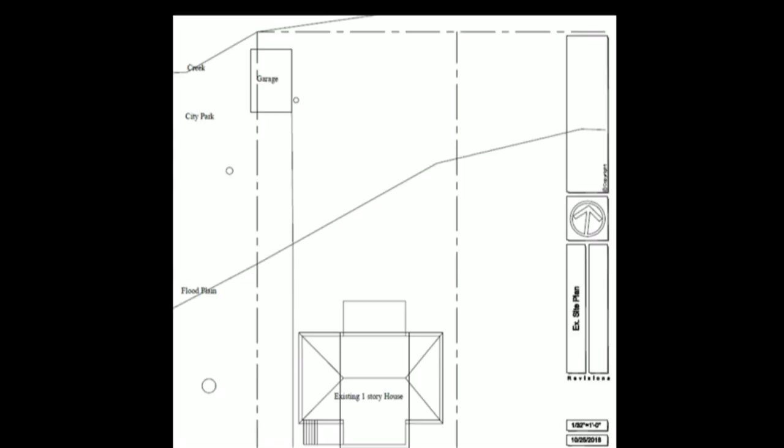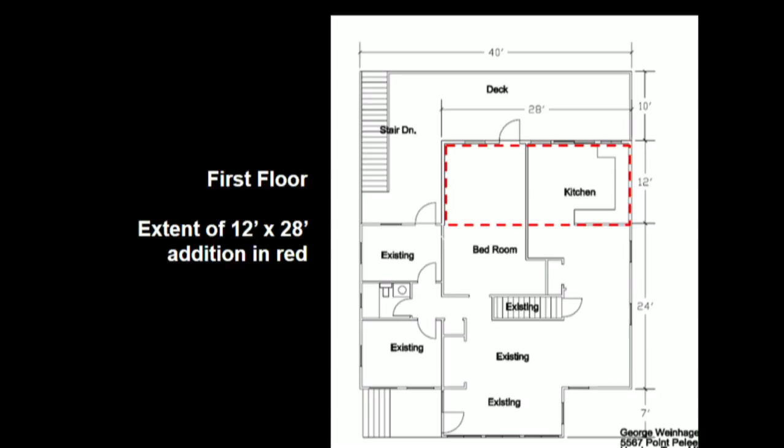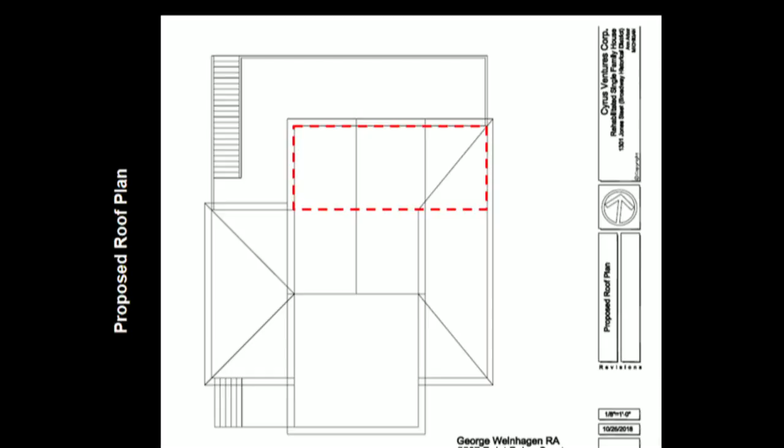This is the first floor. Again, this is the basement, same 12 by 28 addition in the red dashed line. Here you can see the elevations from the front to the rear of the house. We've also got a side elevation that we can reference. Again, an aerial type of view showing the red dashed line of the proposed addition to the rear of the house along with the deck.

The Secretary of Interior Standards. Number 2, the historic character of a property will be retained and preserved. The removal of distinctive materials or alteration of features, spaces, and spatial relationships that characterize a property will be avoided. Number 9, new additions, exterior alterations, or related new construction shall not destroy historic materials that characterize the property. The new work shall be differentiated from the old and shall be compatible with the massing, size, scale, and architectural features to protect the historic integrity of the property and its environment. And number 10, new additions and adjacent or related new construction will be undertaken in such a manner that, if removed in the future, the essential form and integrity of the historic property will be unimpaired.

SOI guidelines, building site. Identify, retain, preserve: recommended retaining the historic relationship between buildings, landscape features, and open space. Not recommended: removing or radically changing buildings and their features or site features which are important in defining the overall historic character of the building site so that, as a result, the character is diminished.

District or neighborhood setting. Recommended: identifying, retaining, and preserving building and landscape features which are important in identifying the historic character of the setting. Not recommended: destroying the relationship between the buildings and landscape features within the setting by widening existing streets, changing landscape materials, or constructing inappropriately located new streets or parking.

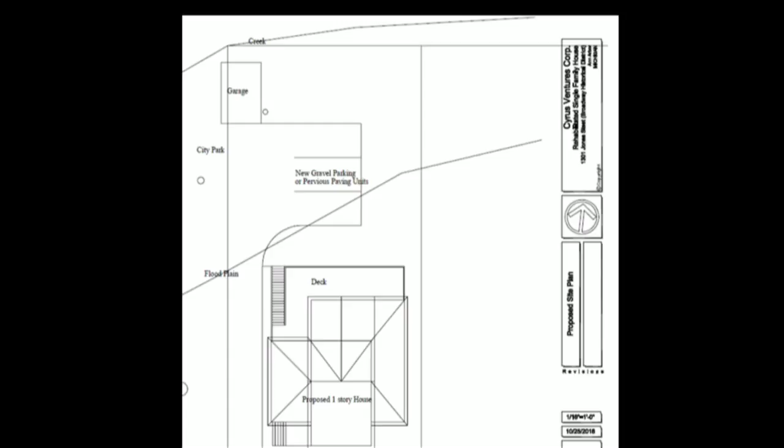You don't need my address, right? No, just please sign in. There's a sign-up sheet. My name is Abraham Marsban, I'm the owner of 1301 Jones Drive, and I can answer any questions with George's help.

Do you have anything more to add to the application at this point? First of all, we'd like to thank you for the site visit last Tuesday. It was very informative, both to us and hopefully to you.

Out of that discussion, we tried to show you what we were working with. There have been some discussions of additional retaining walls to protect the floodplain. We're working with DEQ on that issue, so that we are not changing the hydraulic aspects of the floodplain in any way.

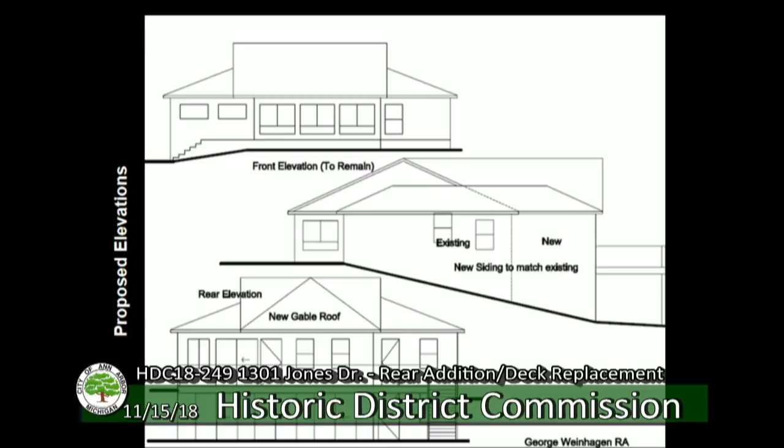With that in mind, the drawings that you saw were somewhat preliminary because we were trying to meet the deadline for your commission. There's not much change though—he's prompting me to remind you that we are not changing those drawings to any major extent related to historical aspects. We're not changing. And I believe Abraham has talked to Chris and to Jill since the site meeting to assure them of what we're doing. I believe that gives you the information you need from a historical district perspective.

We're not changing. We're maintaining the existing siding and using the existing siding, which isn't the original siding for the building when it was built.

It has portions of a Michigan basement, and it has some log joists in it. It was built back in what I would consider to be the 1830s to the 1860s—the original portion of it. Then there were two additions, one on the north and one on the south, and that's what you see today.

And then there was a covered porch, which I think was on the original house, but then they enclosed it and made it an atrium type of thing on the front of the house, which has been there. It was permitted, and you saw it in the site visit. That is not to change.

So the one thing I don't see on our plan is the location of the egress window. If you go to the basement layout—in the basement layout, what I had done on the original drawing was show three sliding doors because of the view out there.

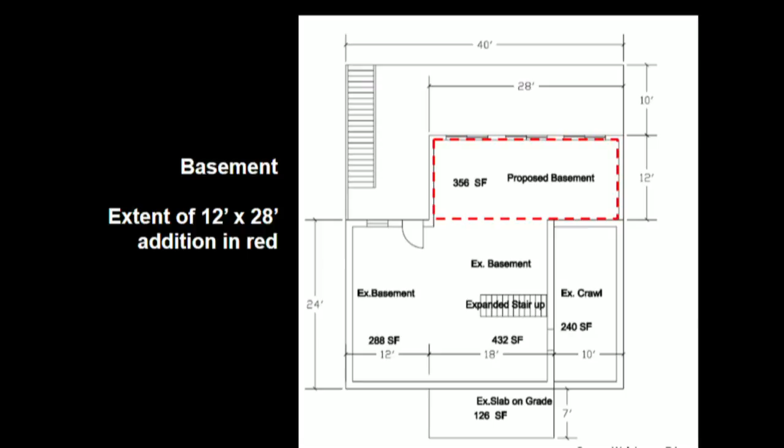I think one thing that might come up is when you do have your landscape plan, we do go through landscape plans through the Historic Commission. And I would talk to Jill about that next week before you guys start doing that. You may have to put in another application with the landscaping. I will certainly work with Abraham on that. I will be involved with this project as it goes along.

I'm not sure there's going to be major landscape changes—mostly what's in the plan. But how tall is the retaining wall projected to be?

Well, the retaining wall will be a retaining wall. Whether we have vegetation in front of it or behind it—probably not behind it, maybe some in front—anywhere from 0 to 3 feet. Not higher than that. Oh no, it's not going to be tall grasses or anything like that. Most of it will probably be no retaining wall, but in some sections it may come up to 2 feet.

Well, the height of the retaining wall, not the vegetation—the height of the retaining wall will probably be approximately 3 to 4 feet, with its foundations below it.

Since we have more than 18 inches of fall, we need to protect it, so we will probably have some form of railing there also.

Okay, so make sure you bring that up with Jill, because it's not in this application. It wasn't in the other application either, and you may still have to. Jill and I had a conversation with Chris this morning.

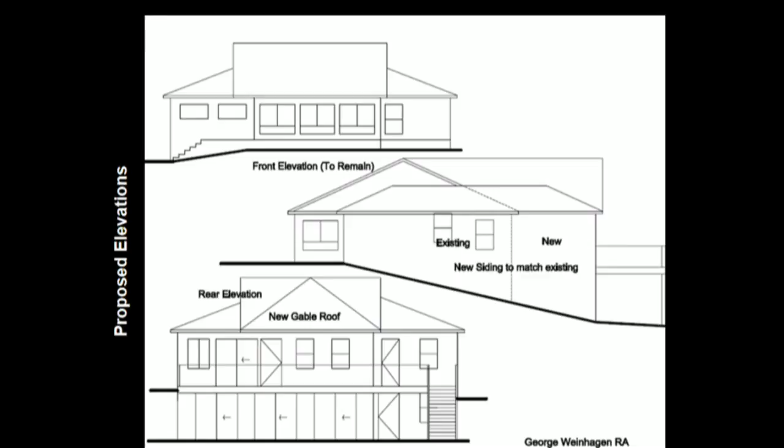So I'm talking about on the elevation at the bottom of the sheet where we have the sliders at the basement level, only one sliding door? The slider that is most to the south.

Also, the door you notice there underneath the deck will no longer be there, because we're putting the door in facing the wall coming out, and the 12-foot wall coming out, so you will not have that opening there.

So what do you see there? I'm not following what you're describing. Well, I don't have a stylus with me, but we can go back to that door. Have you got the plan?

Oh yeah, so the north elevation is the side that faces the backyard, which is where, well, we're having discussions on that. Okay, so for reference in this meeting, the north elevation as shown on the plans is the rear of the yard, and that's where the addition is going.

You will only have that sliding door, you will have a single window, and then a double window there, and that's all we need.

Okay, did you guys understand that? So a sliding door instead of the 3 sliding doors, a single window in the middle, and a double window on the... then where's the egress window we were talking about earlier? Because I thought that was on the north.

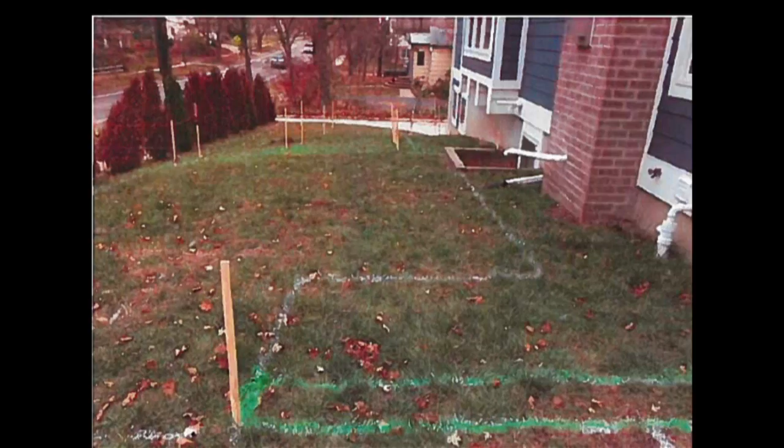Here are the pre-snowfall slides, provided by the applicant, which may be easier to look at, with the green lines where the proposed wall is along South 7th. Then you can see some of the patio area going down and some of the turf area. You can always refer to these, the steps that will be going down to the patio area - a spiral staircase. You can see just above where the window will be converted to a door.

Again, steps down towards the driveway. The strings will show you some of the heights. We can always go back and refer to the proposed heights. Again, looking along South 7th, going south, where they're proposing the wall.

Again, this is along the drive, proposing impervious surface. This is an adjacent neighbor, actually across from West Jefferson, with a similar type of retaining wall. You can see some of the heights and materials we can refer to. These are, from the applicant, some of the materials that may be proposed or could be in consideration. An elevation

from South 7th. Again, kind of an aerial view of what's being proposed - the turf area, the brick paved area, the landscaping and the walls. Again, another view. This is the gate to be located at the front wall of the house. This is an example of the stair to lead from the new west elevation door to the patio. You can look at those locations on the plot plan. Again, materials that may be used. Other examples.

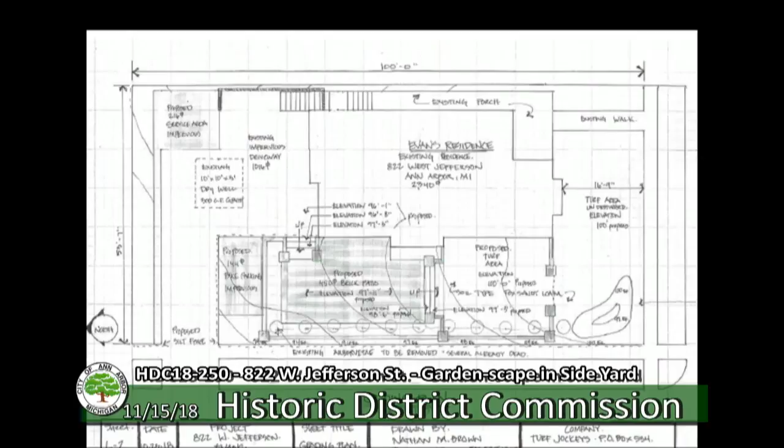I mean, would there be any objection to - I don't know if you agree with me or not - but just the 3 front ones that are actually on the sidewalk, I don't think any of the other ones will have an effect as much as those.

And even with the landscape plan, I think getting rid of the ones that are right on the sidewalk would help knock it down a little bit. Sure, with the 3-foot height opposed to the 4-foot height. Yeah, and I think that brings up something else we discussed, but maybe we should save that for the discussion section.

I have a question. The brick patio that you're going to walk down to, you've got an elevation for it, 97 foot 11 inches, but I don't know what the elevation of the finished floor is - is that 100, or is that where you're working down from? I wasn't sure, and the reason I was curious was trying to visualize the spiral stair. The way it's drawn, it looks like you come out of the spiral stair and then walk underneath the landing you walked out on, but I didn't think that would be possible. No, it won't. Okay, is it more like the photo you included where you sort of spiral and then come back?

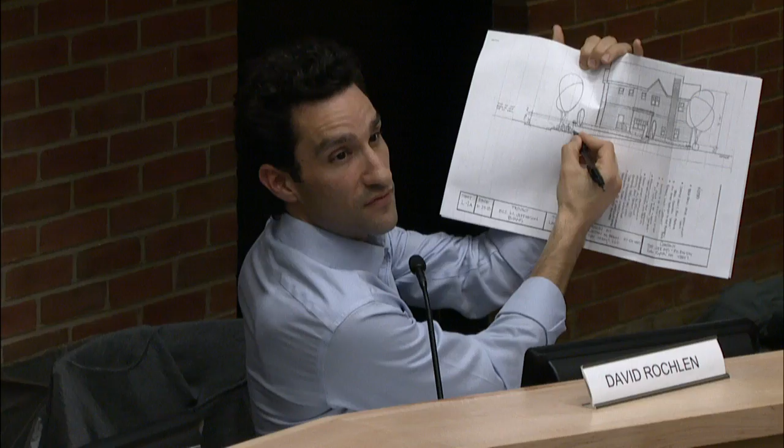So somewhere here, there's the windows, and then my last question here, just to understand it - that 9711, where is it relative to the height of this wall here? It's about in the middle, right about there. So is it right there, or is it below? It's slightly below that. Got it, okay.

All right, sorry for the confusion. Nope, that's okay, that's why I'm having a question. Okay, I think those are my initial questions. Any other questions? At least. All right, thank you. You may be seated.

Oh wait, I have another question. Well, in one minute - sorry, sorry Nathan. No, it's okay. All right, okay.

Let me just make sure - it says existing rain garden. Are you going to be planting things in the rain garden, or are you just leaving it exactly how it is? We're probably going to dress up the wall sides, is all we're going to do, but we're not touching anything with the rain garden itself. We're going to make it look a little nicer than it is now, to be more appropriate to what the landscape looks like now. So yeah, we're going to keep the integrity of that rain garden.

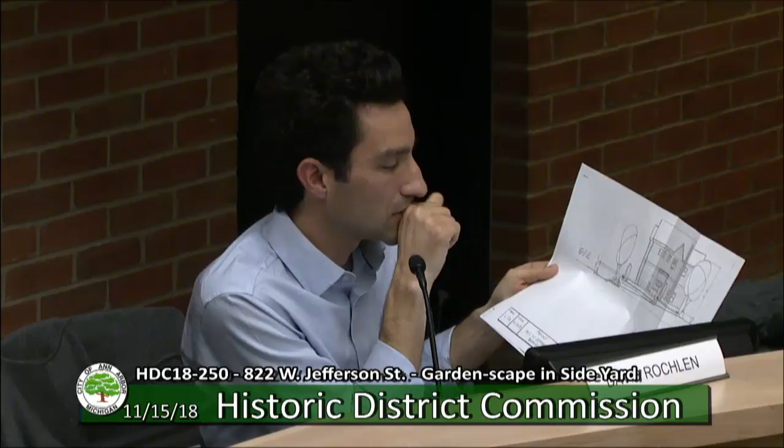Last question - at this wall here, that's a far drop, do you need a guardrail there at your patio? Because the wall's above the patio. Correct, down there by like 3 feet. So it's a 3-foot wall? It's a 3-foot wall, not a retaining wall, it's just a wall. It's a 3-foot wall at that, correct, okay.

And then we've got the landscape on the outside wall - we've got buffers, 3-foot boxwood hedges around that, so we've got a 3-foot buffer, okay. Correct. All right, and then I guess that access works - if it's 3 feet high, then you're good. Okay, yes, thanks. Yeah, because there's really not much of a drop off once you hit that side elevation.

Where that bike is parked, that area is only maybe less than a foot lower than the grade of the patio. You think the bikes are just a foot lower than the patio? Yeah. Yet there's a 4'6" wall there? Okay, yeah, all right. Correct.

Moving on to the public hearing, are there any members of the public who would like to speak on this agenda item? If you're going to come up, please make sure to state your name and sign in on our sign-in sheet right up front.

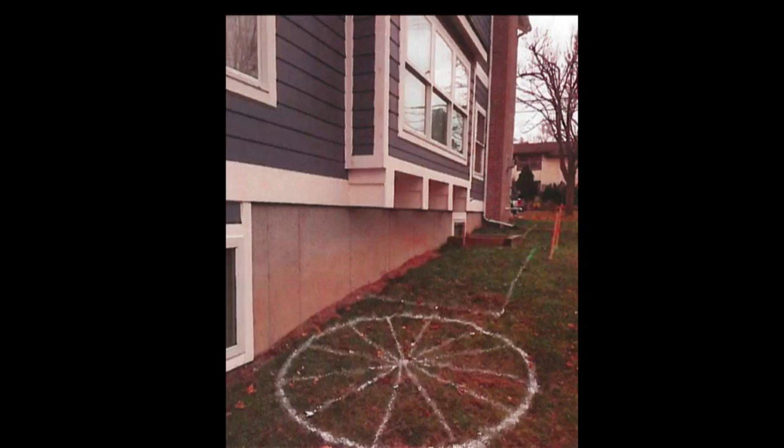So on-site, Commissioner Cope and I discussed potentially minimizing that wall height to be 6 to 8 inches above the patio line, above the finished grade consistently, so that it creates more of a buffer. If you look at some of the surrounding houses in the photos, it's just a short retaining wall with a little bit of grade above it—plenty of support, and it also gives a nice landscaping feature and creates a buffer. I think there's additional planting along the proposed plan that would still provide some screening. I just wanted to put that out there for discussion from the rest of the commissioners, and potentially to the applicant.

Yeah, I agree with you. I just think, seeing the northwest side, I don't know that this application as drawn meets the standards as far as the spatial relationships and neighborhood setting. I think there's definitely a lot of potential—I don't have any issue with the interior scape of it. I think it's a beautifully drawn plan, and I don't think we have any problems meeting the standards with the plan itself. I just think the wall height, being up above everything, doesn't really fit the character of the neighborhood and the surrounding settings.

Which I'll pull up—regarding the wall, Secretary of Interior—should we just talk about the wall as a topic? Yeah. I agree, I'm slightly disagreeing with what you're saying but agreeing in concept that, to me, the wall, especially at the end, is too high for the neighborhood. If it was in a backyard or something it'd be totally different, but it's right on the sidewalk.

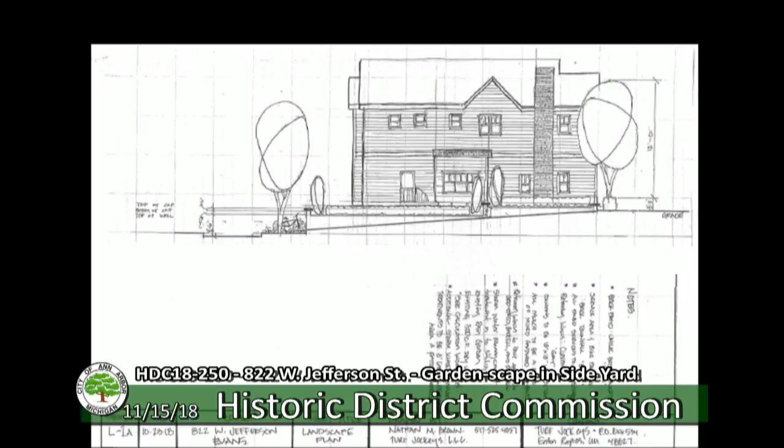At that corner where they meet, there's right there where the steps are, there's a 4-foot drop off right there on the sidewalk. 6 inches off plus the 12 inches.

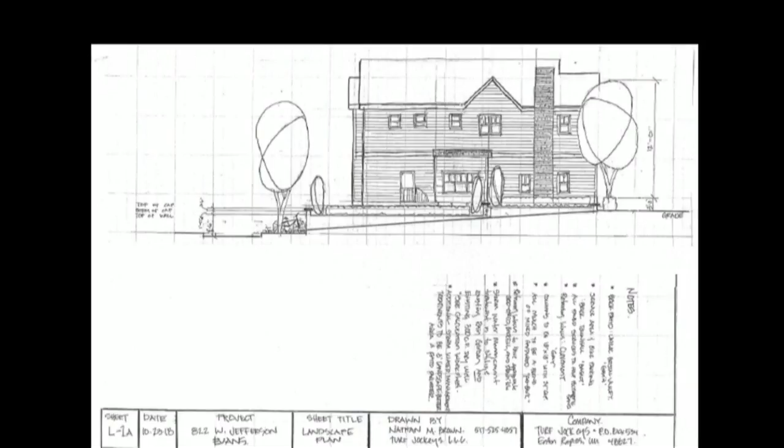I'm not sure what you're saying. What are you saying? So when you're coming down here, need a plan? Yeah, let's look at a plan. Return to the plan, please. Yeah.

It almost is as if that needs a fence on top of that area. So where the steps are and where the wall meets the sidewalk there, the grade of the sidewalk, it's only about 6 or 8 inches above, it looks like.

Where are you talking about? Right here, okay, right here, all right, yep. So on the other side of that wall, it's a 4.5 foot drop.

How's that possible? Because the patio is flat. It's 4'6", 4 feet deep on the other side of the wall. It's a wall, the brick isn't raised way up to that height.

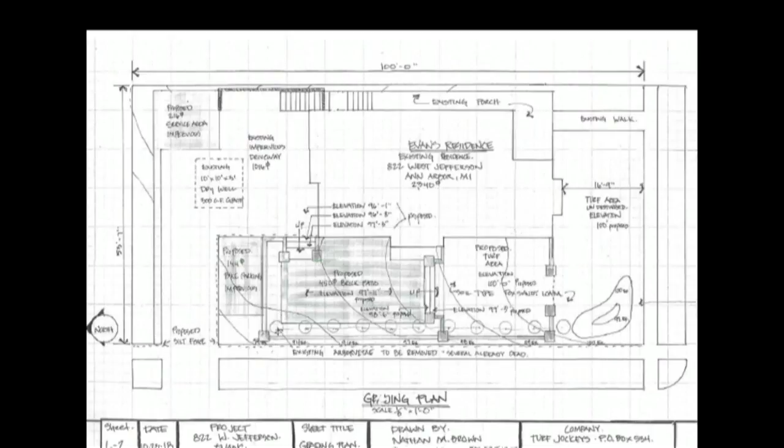But there's 1, 2, 3, there's 4 risers, 7-inch risers, it's 28 inches from the turf to the brick patio. And the turf grades down towards the hill, the turf grades down, 20 inches. Okay.

So, yeah, right here, you're dropping 4 steps down, which means from where that arborvitae is at the top corner of the stairs to the bottom, there's a 28 to 30-inch drop right there from the sidewalk. My kids are gonna be running up and down that.

Well, the sidewalk's also dropping though, with it. But on the inside, I'm talking about the patio, it's a big drop-off, where it's easily accessible for people in the area to jump up on top and climb all over it.

So I think there's gonna be red flags with this plan even beyond us. I think though, for purposes of this discussion, that the height is the thing that we're saying is out of scale, that doesn't meet our height guidelines, that it's out of size and scale to the rest of the surrounding area.

So if we had a motion, maybe an amendment, yeah, a motion to change the motion or amendment to a particular height, if we feel like the wall at a certain height is okay, then I think we could move forward that way if we can. So I think we vote on this motion and then, should I amend the motion? Read it or amend the motion.

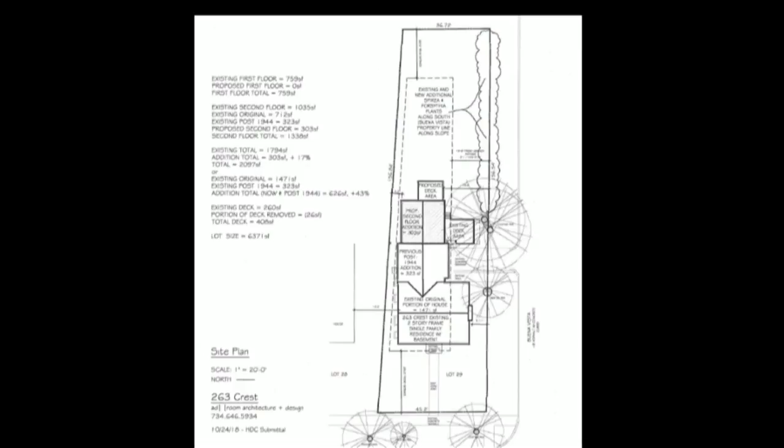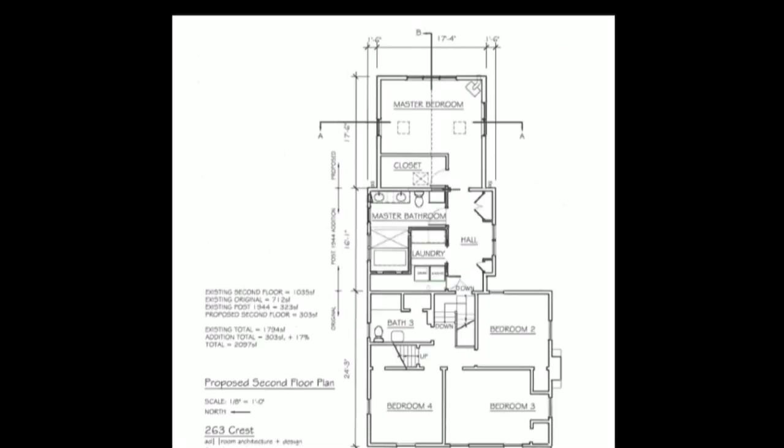Again, additional elevations from the rear of the house. This elevation shows the proposed addition above.

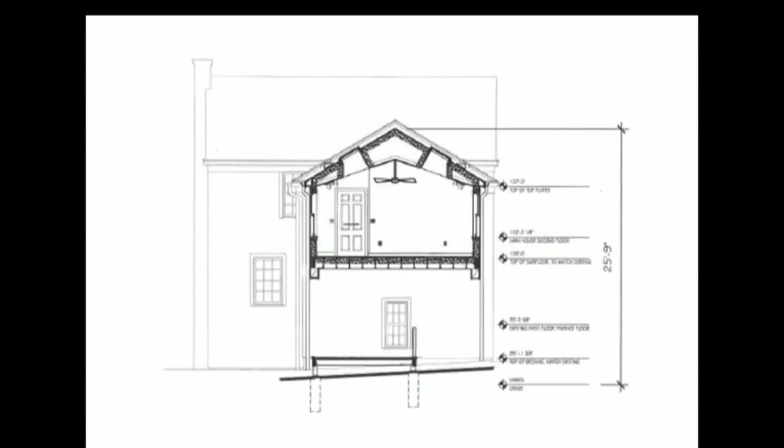You can refer back, we've already discussed the Secretary of Interior standards of 2 and 9 and 10. Additions recommended: constructing a new addition so that there is the least possible loss of historic materials and so that character-defining features are not obscured, damaged, or destroyed. Locating the attached exterior addition at the rear or on an inconspicuous side of a historic building and limiting its size and scale in relationship to the historic building.

Guidelines for all additions: appropriate, limiting the size and scale of the addition in relationship to the historic building so that it does not diminish or visually overpower the building or the district. The addition's footprint should not exceed 1/2 of the original building's footprint or 1/2 of the original building's total floor area.

That concludes my presentation.

Myself and the Commissioner were at the review committee for this particular site. Do you have any review for me? Yeah, I think the addition is pretty straightforward.